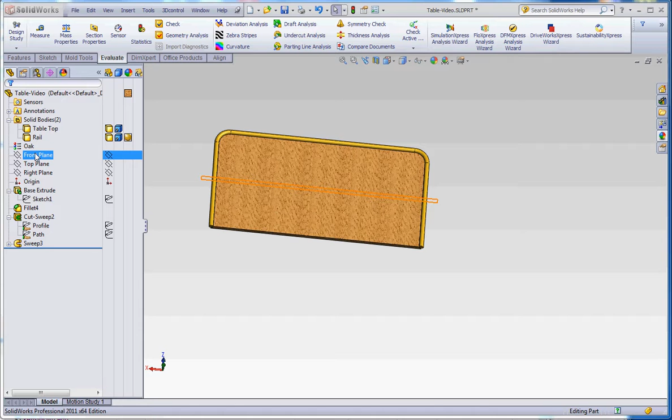So let's do the path first. So if you look at the front plane, I'm going to go ahead and draw a profile on the front plane, but we want to be able to draw right on the surface of our countertop or table, and we're going to draw a path from there. So let's just very quickly put together maybe a corner rectangle. We're going to make sure that we intersect that front plane, which runs right down the middle here, so we can put our path on that front plane when we draw that.

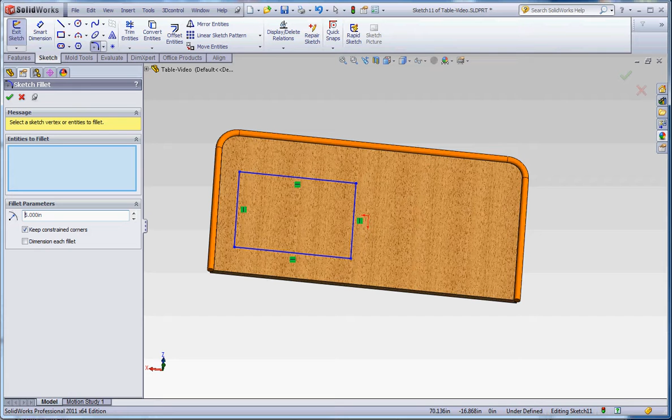Now let's put in some fillets in there. Maybe a 5-inch fillet. We'll put it in each one of these corners so we have a nice decent path for it to follow. And then green check mark. So there's our path. We're not going to fully define this. We're going to keep this kind of loose for now, for the sake of demonstration. And so we're going to keep it as such.

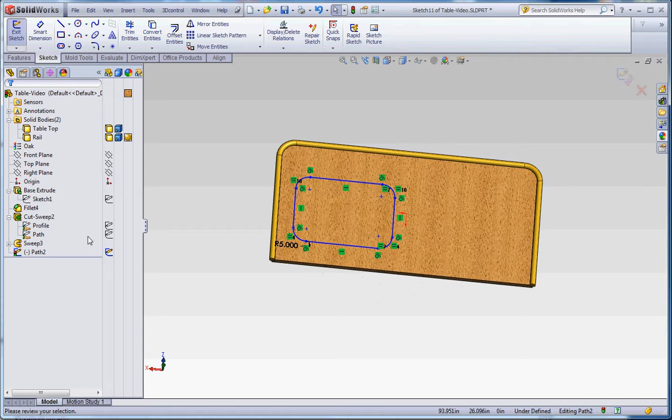So our path, our sketch 11, is going to be our path. We're going to call that path 2 because we already have a sketch called path. It's probably not going to like that. And then we're going to go ahead and rebuild that. And on our front plane, we're going to draw our profile.

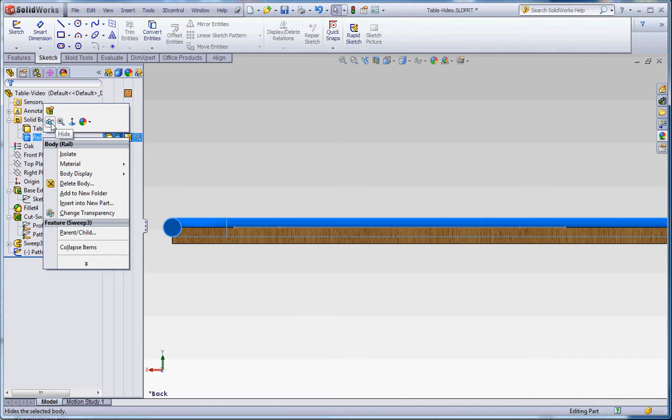So let's go ahead and go normal to that front plane before we start drawing so we can see what we're doing. Let's go normal to it a second time so we can kind of draw from the back here so we can actually see the profile of the table. Yeah, let's take our rail body and kind of hide that for now so we don't have that in the way. So I'm going to bend that just a little bit.

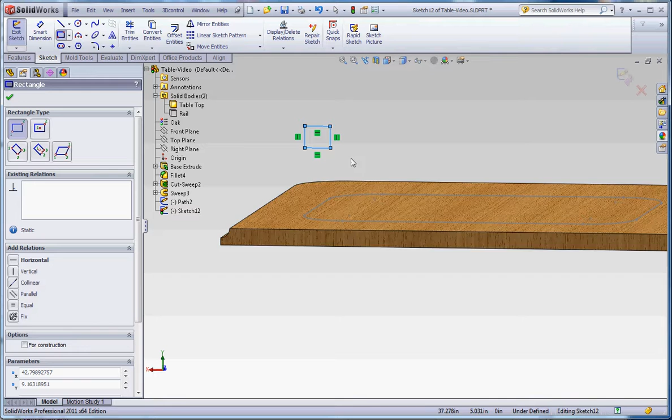We should still be on our front plane, so let's go to sketch. Nope, not on the front plane anymore. Let's go ahead and reselect that. And let's start drawing some geometry. Now I know that the thickness of the tabletop is 1 3/4 of an inch. So let's go ahead and make our profile about an inch. So let's put a dimension on this, so we'll make that about an inch. Actually, let's make that about 1.5 inches. Alright, let's make it 2 inches.

What I want to do is be able to put a center line in the middle of this. And the center line is going to signify where the top of the tool bit is going to be, which is going to be coplanar with the top of our tabletop or our counter. And everything below that is going to be what it's going to cut. So we want to have an inch cut inside of that sweep cut, and everything else on top is going to go beyond that.

So you need to make sure if you do a cut like this, that you do have a portion of your cut bit that represents the profile of your router above where the material is. It's got to be above the material. So you're going to be cutting out a little bit more than just the wood. You're going to be cutting out some of the air that's above that, if that makes sense.

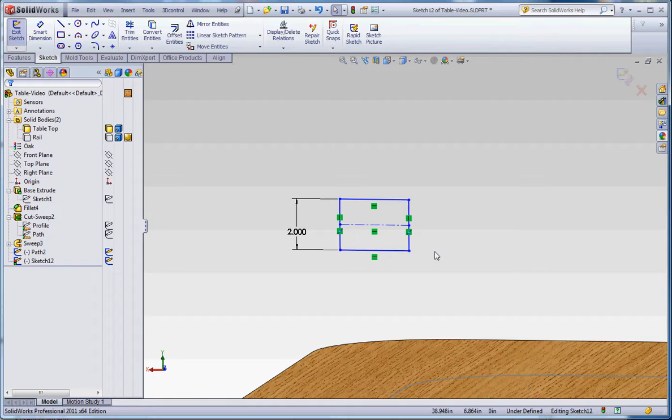It helps it resolve better because sometimes it may not resolve very well at all. So we can make that short a little bit. And let's take all these lines and we're going to make these construction lines. So go over here to the construction line thing, and everything we draw in after this is going to involve arcs and lines, and these are going to be actually solid lines so we can actually see what we're doing.

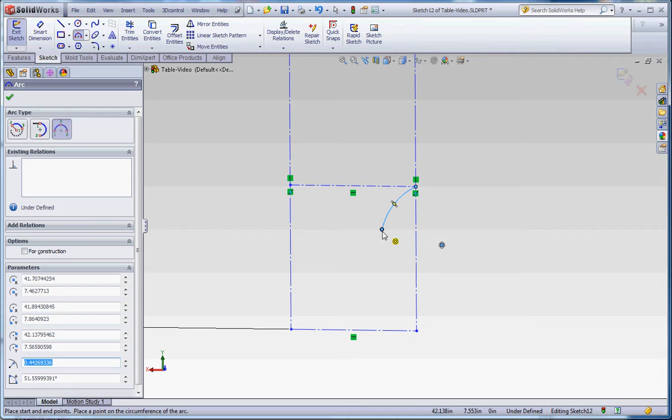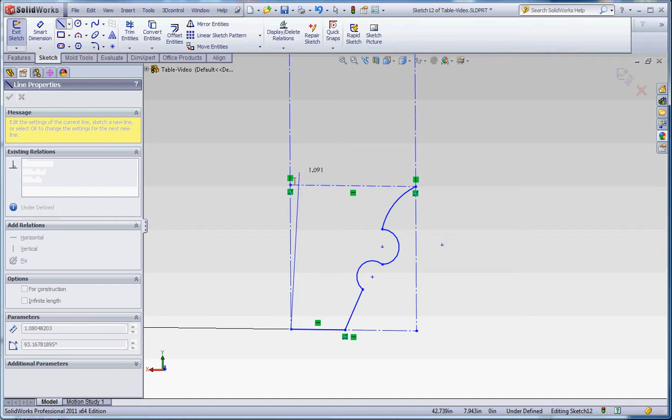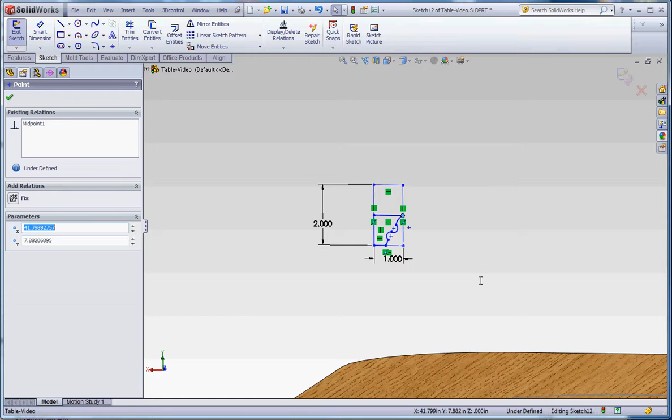Okay, let's go ahead and put a dimension on this just to make sure it kind of stays together and make that 1 inch. And now we're going to take that router bit, that profile which represents a router bit, and move that into our model a little bit. The way you want to do this, we're going to use this as a point that we're going to use to pierce that path. Remember us doing that in the previous film? We're going to make sure we pierce it on this line. So if we click on that point, in that line, we're going to go to pierce, and should move the whole thing over here.

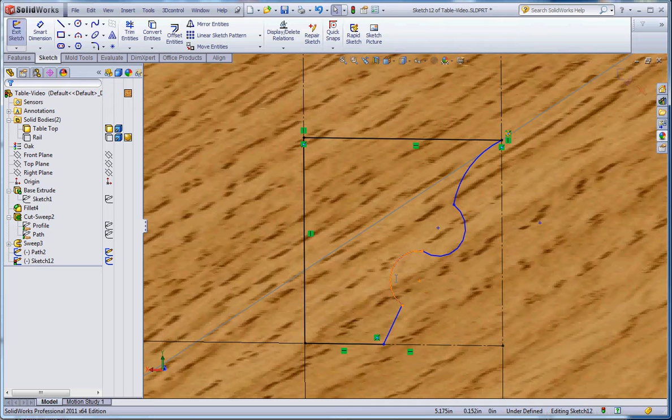So you notice that some of this actually became fully defined because the path is fully defined. That horizontal line, and this vertical line, and this partial horizontal line also become fully defined. What's not fully defined in these are angles and the radiuses of the arcs that we put in. We're going to keep that loose for now.

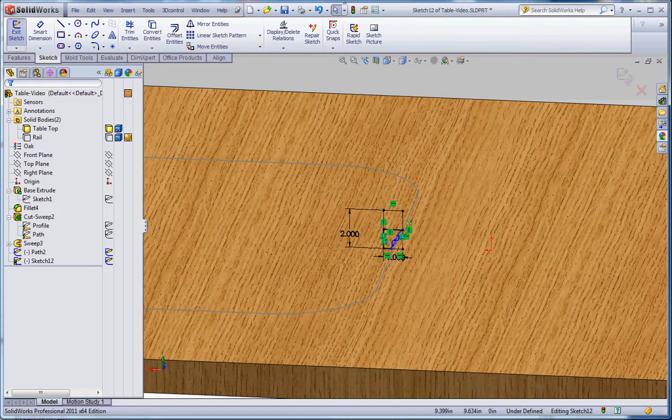And if you do remember, our path really isn't fully defined, but this sketch is fully defined to that path, whereas that path is not fully defined to the model so far. So there's a little bit of relative relations in there that you need to be aware of. So now we have our path. Now we have our profile. Let's go ahead and rename that. We're going to call that profile 2.

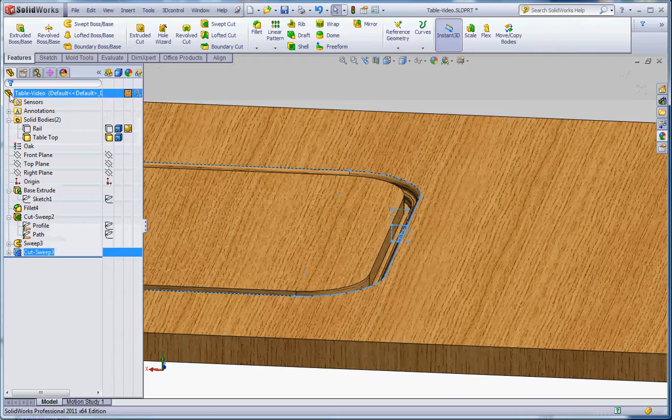2 independent sketches. Let's go to features, sweep cut. So now it's asking for a profile, which is going to be that guy, a path, which is going to be this guy. And now it's going to cut it all the way around. Green check mark. And it's really, really a deep cut. You can probably make modifications to that to make that a little bit less dramatic, or maybe put some fillets in there to do that. But yeah, that's kind of the way it turns out.

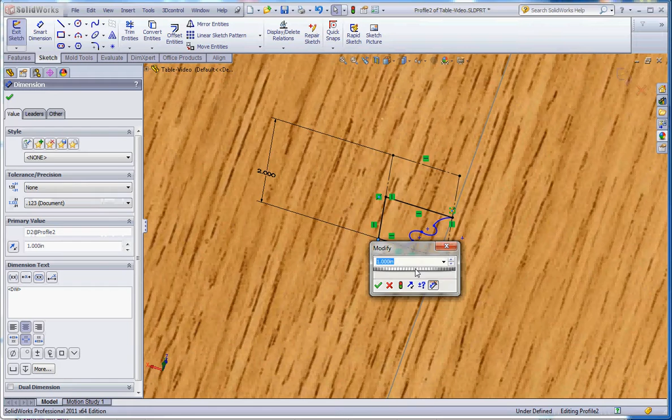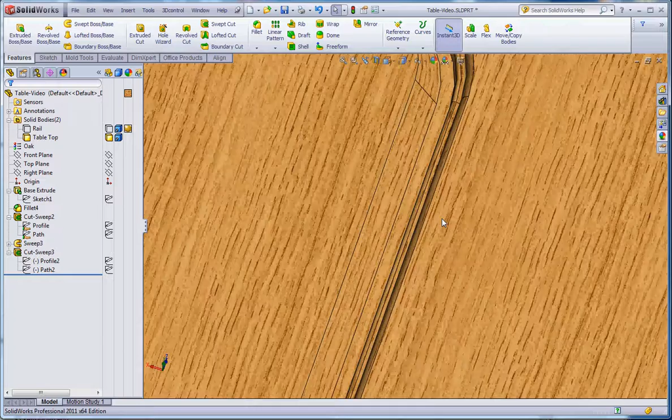Let's go ahead and make some modifications to our profile cut and see if we can make that a little bit cleaner. So instead of making that 1 inch, let's make that 2 inches. We'll make it a lot wider. And let's put a diagonal cut maybe from that point to that point and trim out the other items that we don't need, which is going to be these two. And then let's go ahead and rebuild. Now that looks a little bit better.

Still kind of a deep cut compared to what the countertop's going to be, or if this were a door, that would be something you could do. But it does demonstrate pretty well some of the options you have in regard to doing a sweep cut with something that would resemble and represent a router bit.